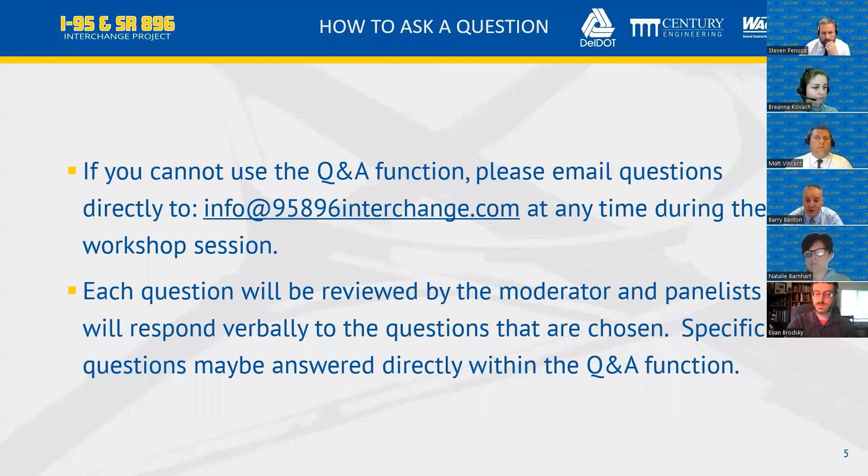So some introductions. First of all, as I said, my name is Barry Benton. I'm with GPI. I'm the bridge design lead for the project. We have two presenters for the project. The first presenter is Breanna Kovach. She is with DelDOT. She's the group engineer from Project Development North, and she is going to talk first. And then we're going to have Steven Penoza from Century Engineering. He's the design project manager.

Other panelists that we have on here to help answer any questions: we have Matt Vincent, the DelDOT Chief of Project Development North. Mark Buckalew, the DelDOT Chief of Construction and Materials. John Ledger, the DelDOT Group 2 Construction Engineer. Evan Brodsky, the DelDOT Group 2 Area Engineer. C.R. McLeod, who's the DelDOT Director of Community Relations.

Robin Bryson, with DelDOT Community Relations. Natalie Barnhart, AECOM Community Relations. Kate Ford, the Century Engineering Highway Design Lead. And Brandon Zarilla with Wagman. He's the contract project manager. Wagman is the contractor who won this under low bid.

The agenda for tonight is first, we're going to go through the project background. Then we're going to talk about the proposed improvements, give you an idea of what to expect during early stage construction, and then finally the question and answer period. So with that, I'm going to turn it over to Brianna, and Brianna is going to give you some information on the project background.

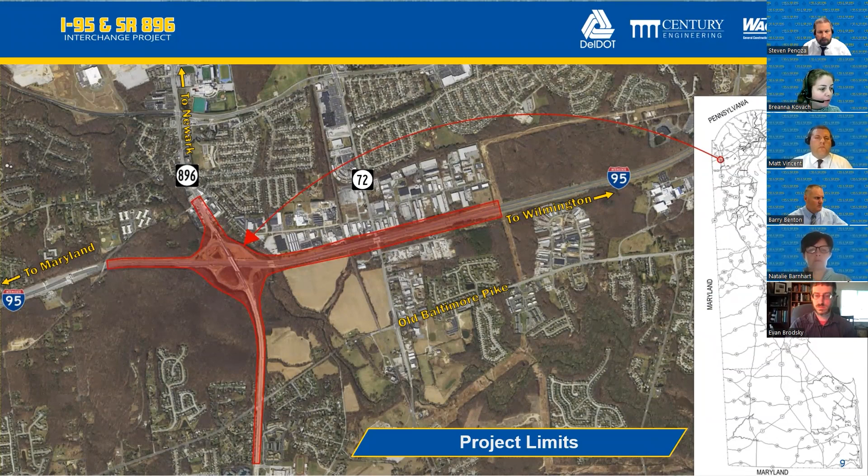Perfect. Thank you so much, Barry. And as Barry mentioned, we'd first like to start off by explaining a little bit about the background of the project and why we're doing this. I'm sure you're all very familiar with this location. The project is located in Newark, Delaware. The limits extend along 95 from the 95 toll plaza into Maryland to approximately a mile east of the interchange area. And along 896, the work extends from Glasgow High School from the south up to the north to Welsh Tract Road.

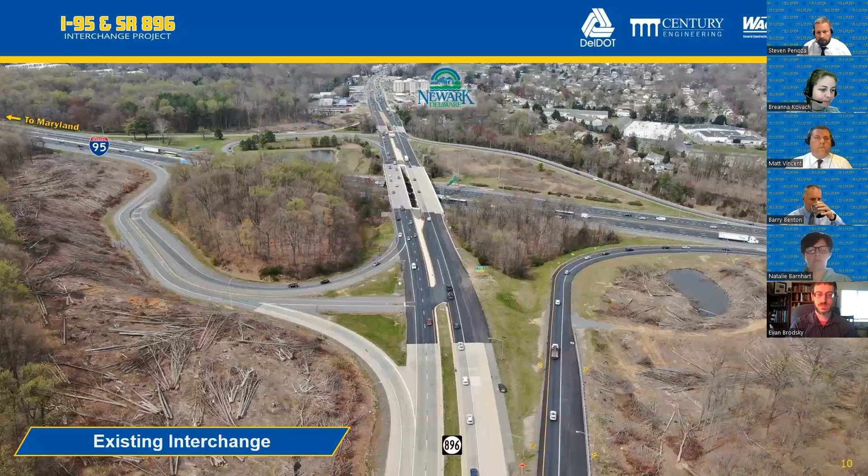And this is just a photo of the existing interchange as it is today, just to give you, again, some perspective of where exactly we're going to be working versus just the plan view that you saw on the previous slide.

The southbound 95 off-ramp to northbound 896 had a very short merge area on the northbound 896 when we started this project. That small merge area had a pattern of crash clusters in it. We'll get to it in a little bit, but this actually has since been remedied with a short-term project that we were able to implement in the interim prior to this bigger construction contract going out.

In the southeast quadrant, the northbound 896 ramp to northbound 95 experiences crash clusters as well. This is because the geometry here has a straight section of 896 as you're traveling northbound, leading downhill vertically into a fairly sharp curve. This causes difficulties for folks to maneuver, particularly large trucks.

Moving then to the southwest quadrant adjacent to Iron Hill Park, and also similarly the northeast quadrant, they actually have similar issues with the ramps here. You'll notice as you enter the ramp, there is a curved section followed by a straight section. Both of these ramps used to be tolled. Once the tolls were removed, what we see is that folks are exiting that first curve, gain some speed in that straight section, and then when they approach that second curve, they find it difficult to maneuver. So again, we see those crash clusters here as well.

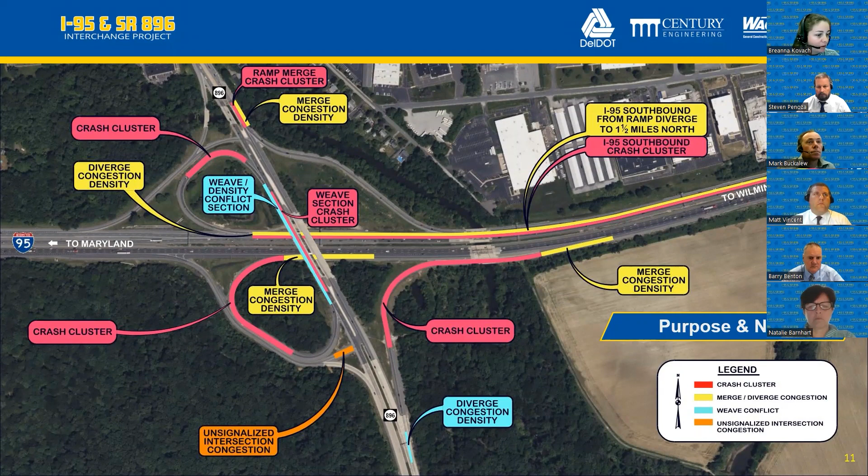So that last slide was a lot of information. And to summarize, the purpose of this project is to improve the safety and traffic operations of the I-95 and SR 896 interchange in order to maintain mobility for local and through traffic while not adversely affecting the operational performance of the I-95 Newark Toll Plaza. Our focus is to improve the level of service or operations of the 95 traffic affected by the merging and diverging traffic. Another big focus is to decrease the number, frequency, and severity of crashes here.

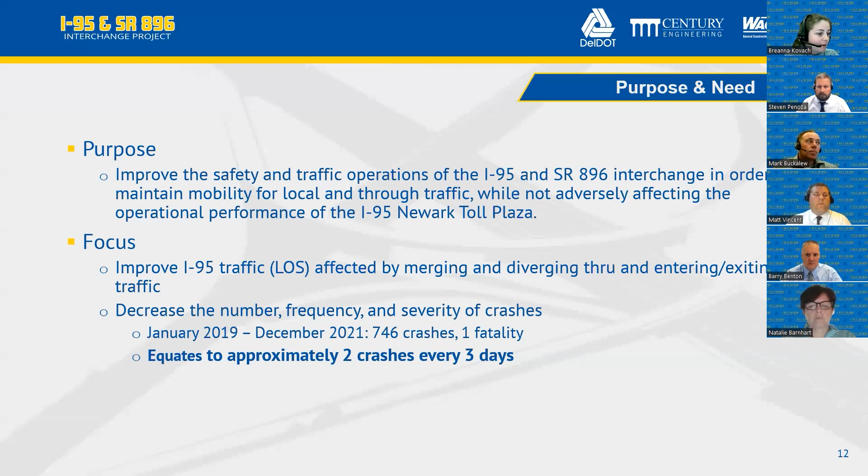Between January of 2019 to December of 2021, there were 746 crashes, including 1 fatality. This equates to approximately 2 crashes every 3 days. I'm now going to turn it over to Steve Penoza to talk through the proposed improvements to show what we're going to do to try to remedy these issues and what to expect during the upcoming construction.

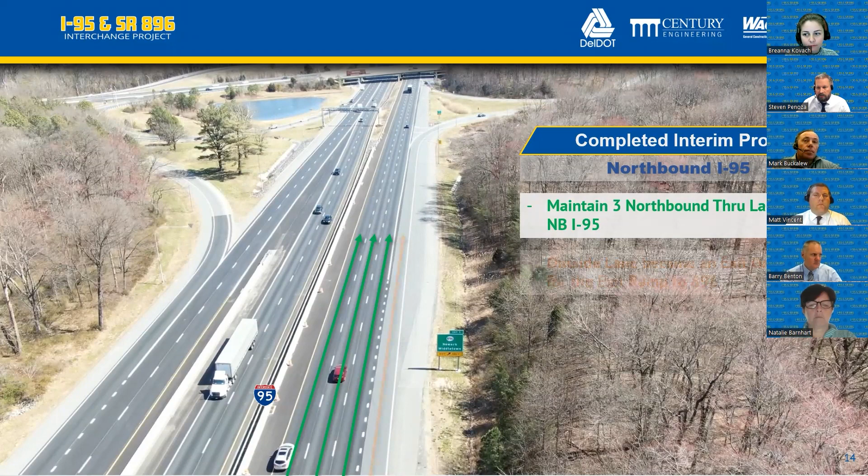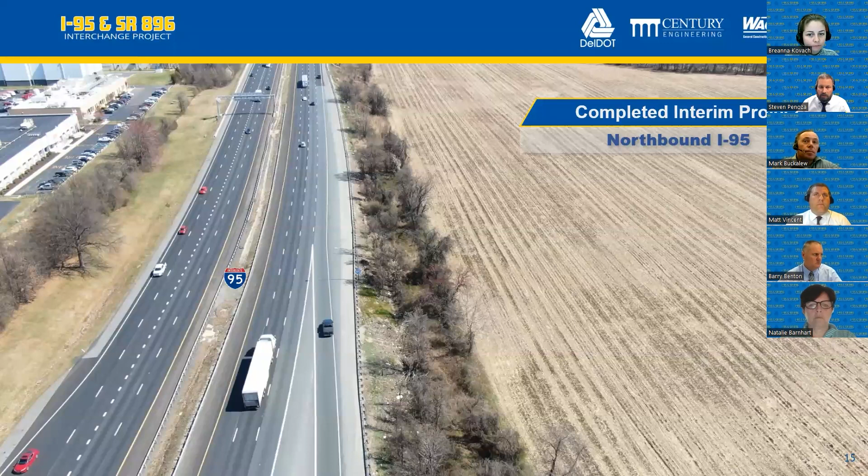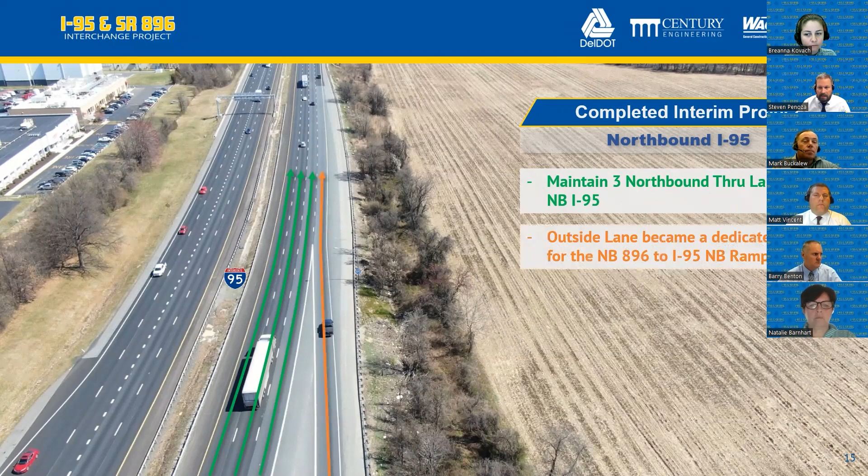Thanks, Brianna. So first I'm going to talk about some improvements that we've already done, which we did as an interim to the interchange project. So along northbound 95, which used to be a 4-lane section through the interchange, we maintained 3 northbound through lanes for northbound 95 through the interchange, and then our outside right lane became an exit-only lane for the exit to 896. So what that allowed us to do on the north side of the interchange was again maintain those 3 northbound through lanes on northbound 95, but now we can bring a very heavy ramp movement of northbound 896 to I-95 northbound on as a dedicated lane. So now that traffic doesn't have to merge in as it did previously.

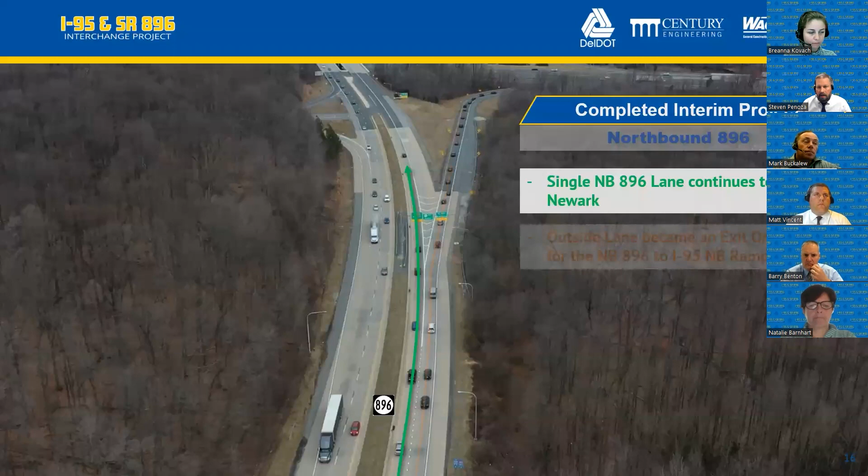We did a very similar project on northbound 896. Here we carried a single lane on northbound 896 into Newark, and then we made the outside lane become an exit-only lane for northbound 896 to I-95 northbound. What that allowed us to do on the Newark side of the interchange is maintain that single lane coming through north on 896 into Newark, but now the way it's striped today, the outside lane is dedicated for the southbound I-95 to northbound 896 ramp movement. So if you remember before, there was a very short acceleration lane for traffic merging onto 896, and this eliminated that issue.

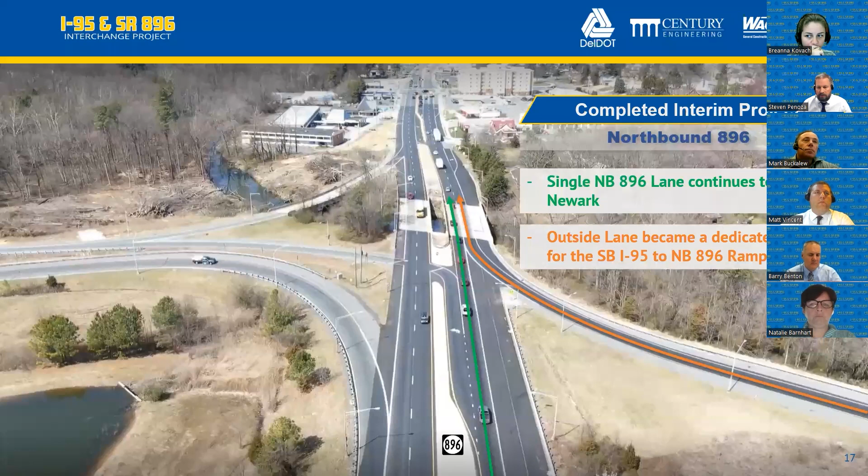But the interim improvement projects didn't solve the main problem at the interchange that Brianna was discussing. The accidents are still very high at the interchange, so a full reconfiguration of the interchange is required. So this slide goes over some of the main points of the project.

So we're going to be constructing 6 new bridges, 10 mechanically stabilized earth retaining walls or MSE walls. We'll be widening I-95 both northbound and southbound for approximately a mile, and that'll be for the ramp acceleration deceleration lanes for the new flyover ramps. We'll be doing rehabilitation of 6 mainline I-95 bridges while we're out there. That includes widening of 4 of those existing bridges for those new ramp accel and decel lanes.

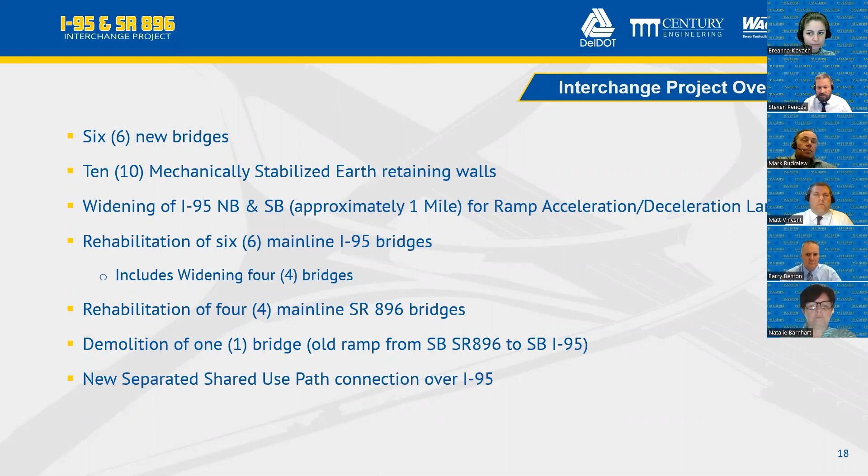We'll also be doing some rehabilitation work to the 4 mainline 896 bridges within the project limits. There will be demolition of 1 bridge, which is the current ramp for southbound 896 to get to southbound I-95. That ramp's being reconfigured, so that bridge is no longer needed. And then we're also going to be creating a new separated shared use path connection over 95 that I'll talk about in a little more detail.

So safety improvements that'll come with our new interchange configuration. The biggest is separation of those ramp movements that Brianna was discussing. We're going to eliminate that weave condition on SR 896 where 896 crosses 95. We're going to be doing the I-95 widening, which is going to provide longer acceleration lengths for merging traffic. There'll be enhanced roadway lighting, some new high mast lighting throughout the entire interchange area.

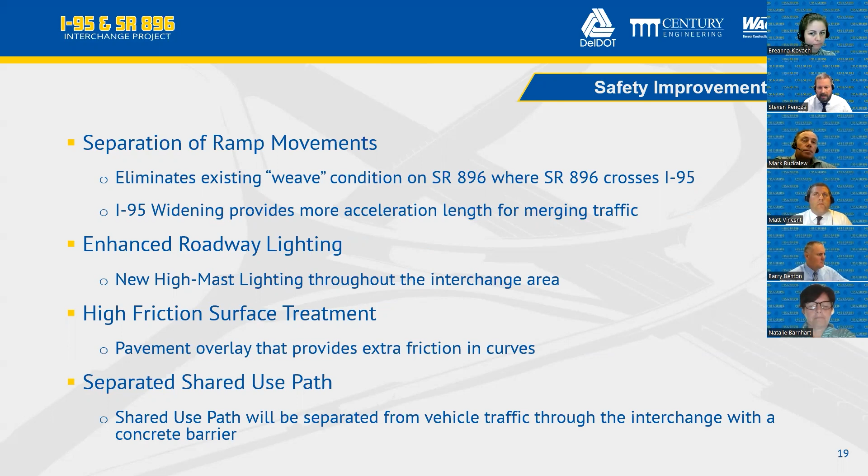We're also going to be implementing a high friction surface treatment on some of our curved ramps. And this is basically a pavement overlay that provides extra friction in curves. And then again, the shared use path. The shared use path will be a separated path from vehicle traffic through the interchange with a concrete barrier.

But coming southbound on 95 to go southbound on 896, you're now going to take our new flyover ramp. So the flyover ramp goes up over 896, over I-95, up onto Iron Hill, and then merges with southbound 896 traffic.

And then the last major movement of the interchange, northbound 896 and northbound 95, that ramp will be reconfigured, but it's essentially the same movement as it is today.

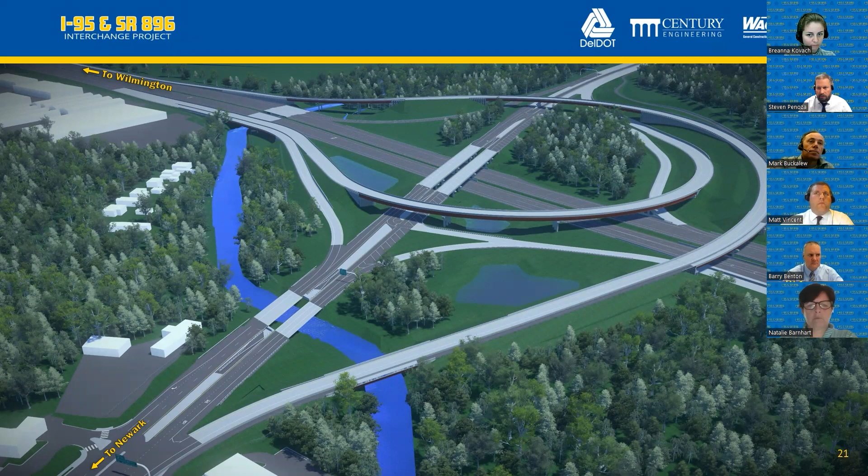Next, I want to talk a little bit about what everybody can expect during the very early stages of construction. Just overall project schedule. We're getting ready to get started here in a couple weeks. You're going to see message boards placed out there very shortly. And then we're anticipating construction is going to be completed in the fall of 2025.

So the beginning of construction, it's broken down into 2 phases. Phase 1 is a very short phase from May to June of this summer. And then when we get into phase 2A, it's a longer duration, about a year, from June of this year to summer of 2024. With this project, we do have 2 long-term detours that'll be in place.

So if you're traveling northbound on I-95 to get off at 896, it's a very low volume ramp. This is going to be closed starting at the beginning of the project in May, and it's going to remain closed for the duration of the project. The detour for this is very simple. We're going to be sending traffic up to 273, turning them around and bringing them back down to the interchange to use the existing ramps to go north or south on 896.

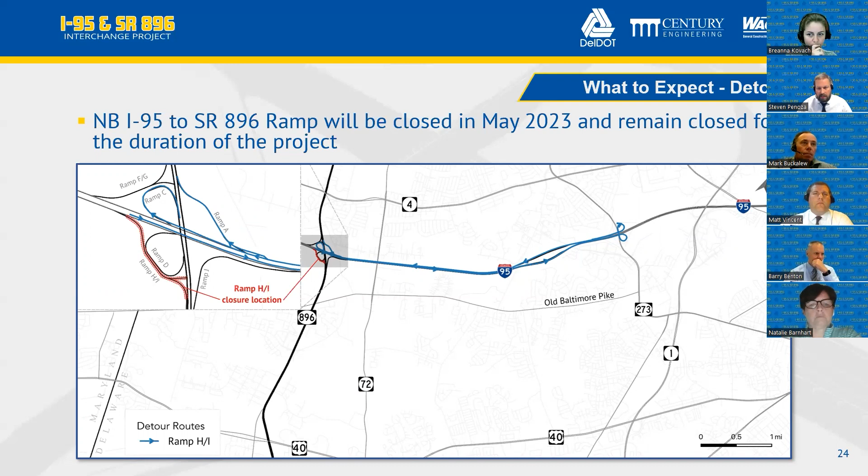A little further into the project, the ramp on the other side, so this would be your 896 ramps to get on southbound I-95. Those are going to be closing in the summer of 2024 to the spring of 2025. And the detours for this are very similar, using the 273 interchange as well as the old Chestnut Hill Road turnaround.

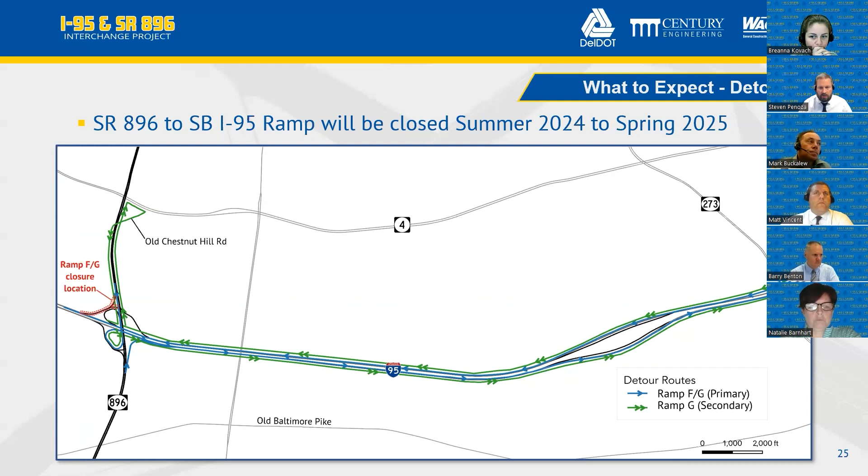We could also expect some additional overnight detours on I-95, 896, 72, as well as the various ramps. There'll also be shoulder and lane closures on I-95, 896, and 72. During phase 2A, northbound and southbound I-95 traffic is going to be shifted to the median shoulder, but we will be maintaining full capacity of I-95 during the day.

Southbound I-95, this configuration will be in place for about a year from this summer to the next summer of 2024. Northbound I-95 will be put in this configuration same time as southbound in the summer of 23, but that's going to go a little bit longer to the end of 2024. And then probably the biggest impact to traffic, especially local traffic, is we're going to have to take SR 72 down to 1 lane in each direction from starting this summer to next summer, so for about a year long.

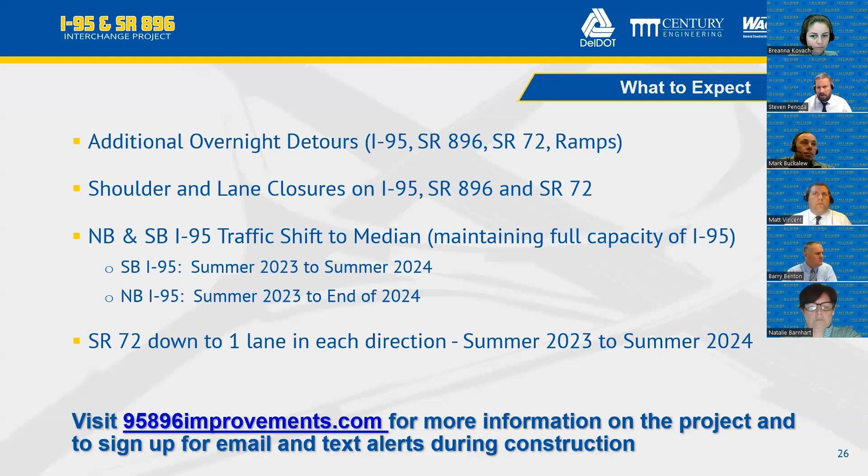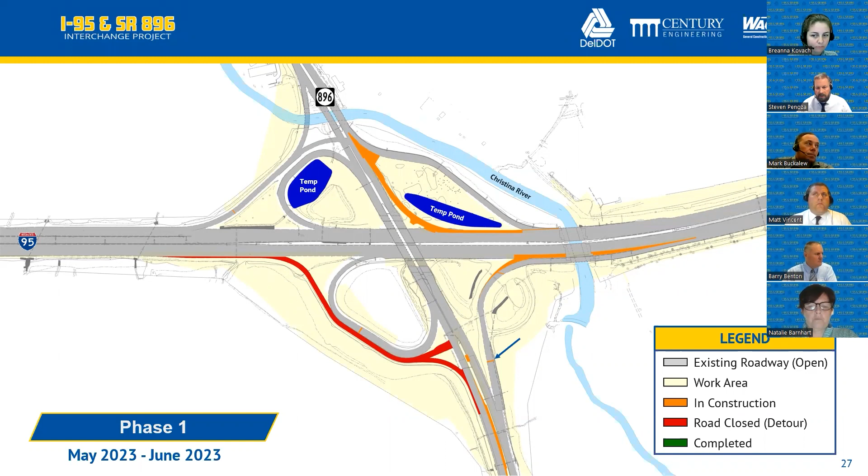So as I said, phase 1 is a very short duration phase. It's really setting up for phase 2A, which is the big phase for the project. So this is going to be May to June of this year. So the first thing we're going to be doing is installing some temporary drainage. This is going to require nighttime ramp closures. We're going to be building a temporary ramp, so your I-95 southbound to 896 northbound. The existing ramp will remain open during phase 1, and we'll be building this temporary ramp to allow us to do work where the existing ramp is today.

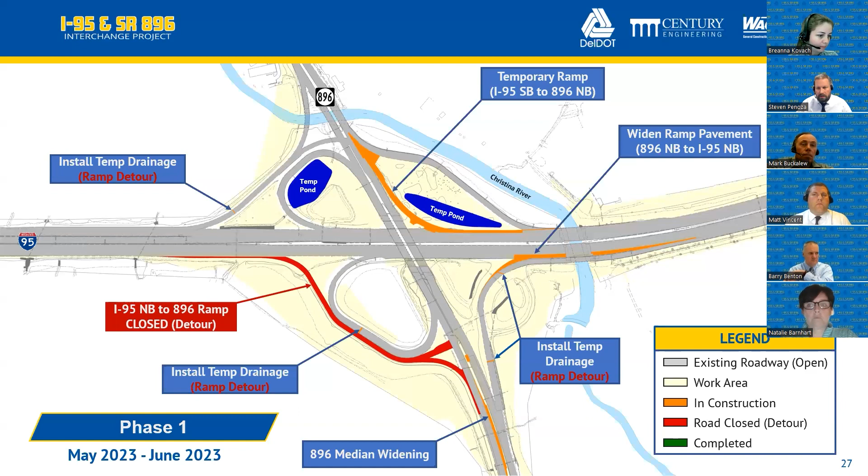We'll also be doing some widening of the ramp 896 northbound to I-95 northbound. And again, that's to set up for the next phase of the project. And then we'll also be doing some widening of 896 in the median for a traffic shift during the next phase. And as I said earlier, the I-95 northbound to 896 ramp will be closed during this first phase, and that will be for the duration of the project. During phase 1, we'll also have some overnight detours for northbound 896, full closures of 72 for some night work, as well as the ramps that we talked about for the temporary drainage.

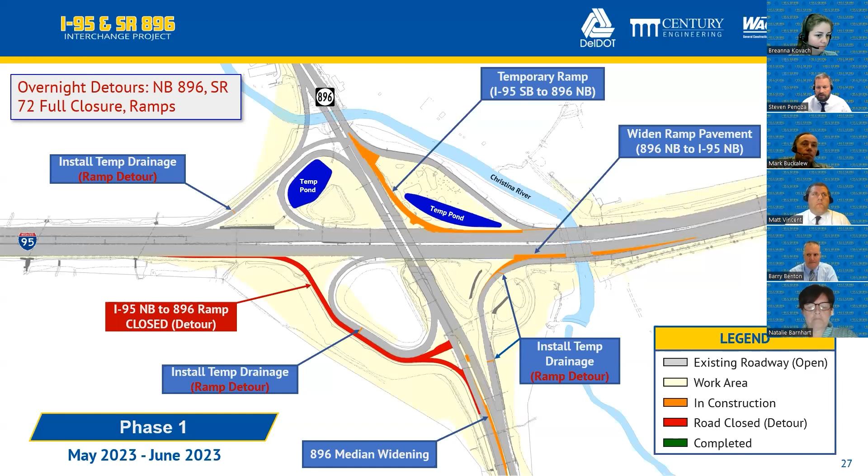Phase 2A will start June this year and run till next summer. As I said, this is a big phase of the project. You can see everything in orange. The job really opens up in phase 2A. We will be widening I-95 northbound and southbound for our new flyover ramp tie-ins. We'll be widening the existing bridges of I-95 over SR 72. And then we also need to widen the I-95 bridge over the Norfolk Southern Railroad. We'll be constructing our 2 new bridges over the Christina River. These are for our new flyover ramps.

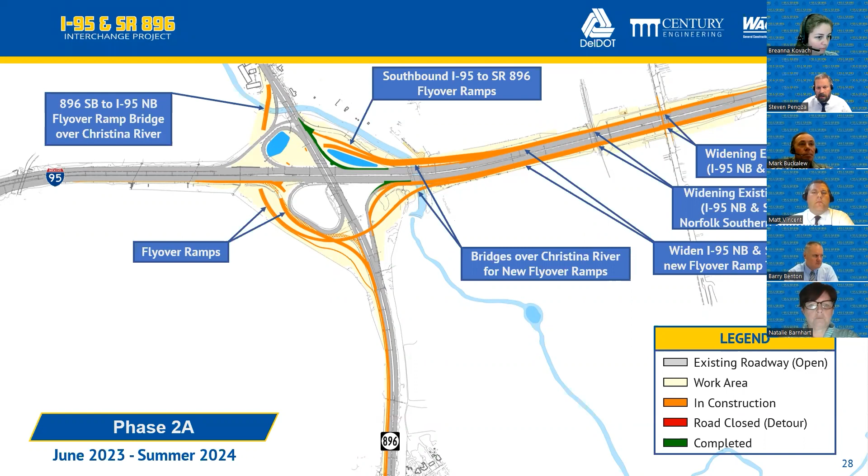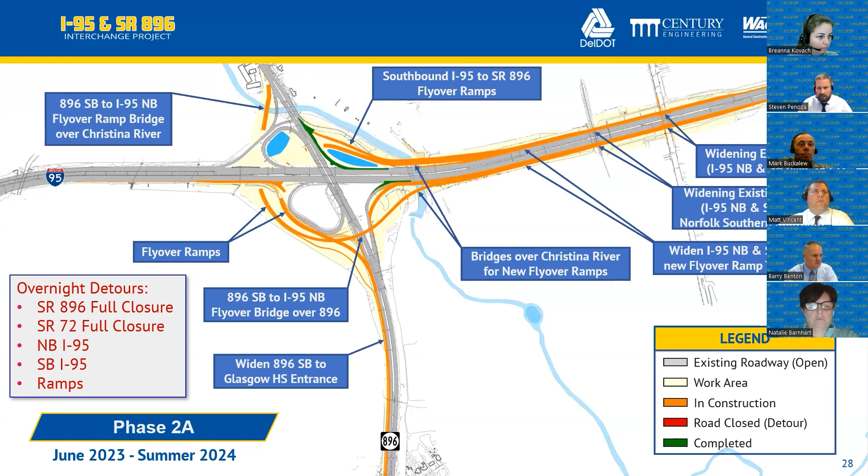Building the new bridge for the flyover ramp to come out of Newark, 896 southbound, I-95 northbound. And then we'll be widening southbound 896 all the way down to the entrance to Glasgow High School. During this phase, there will be multiple overnight detours. We'll be doing a full closure of 896, again, full closures of 72. There'll be northbound I-95 closures, southbound I-95 closures, and ramps. And again, just to emphasize, all of these detours are overnight.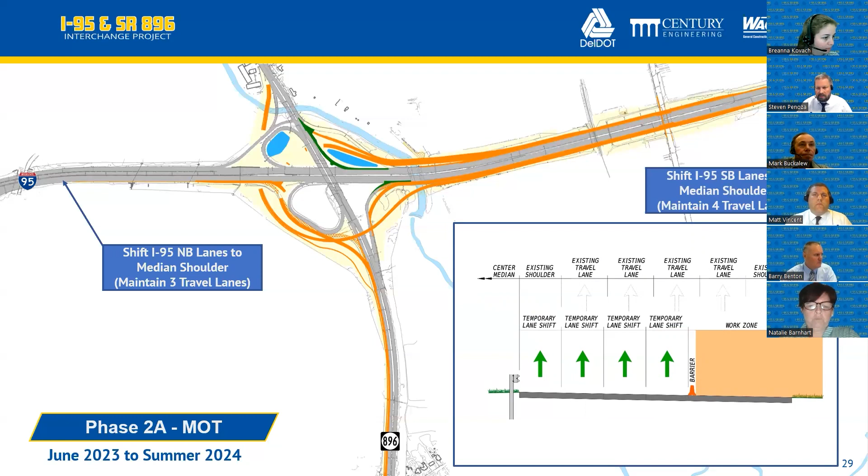This picture is from the video that's available on the website. I would encourage everyone to go. There's 2 really good videos, one that describes the project in detail, and then another that goes through what to expect during the beginning phases of construction. So this picture here shows, again, work zone on the outside, and then the I-95 traffic shifted to the median shoulder, and just emphasizing again, we're maintaining all of our travel lanes through here.

On 72, through the work zone, traveling northbound, you reduce to 1 lane going through the work zone, then return to 2 lanes once we get outside of our work zone. And then coming southbound, again, we'll be reducing southbound 72 to 1 lane. That lane will be shifted to the north side of 72, traveling through the work zone, and then returning to 2 lanes once we get through the work zone. There's also an existing shared use path that goes along 72 underneath the I-95 bridges, and that path will be maintained through the work zone.

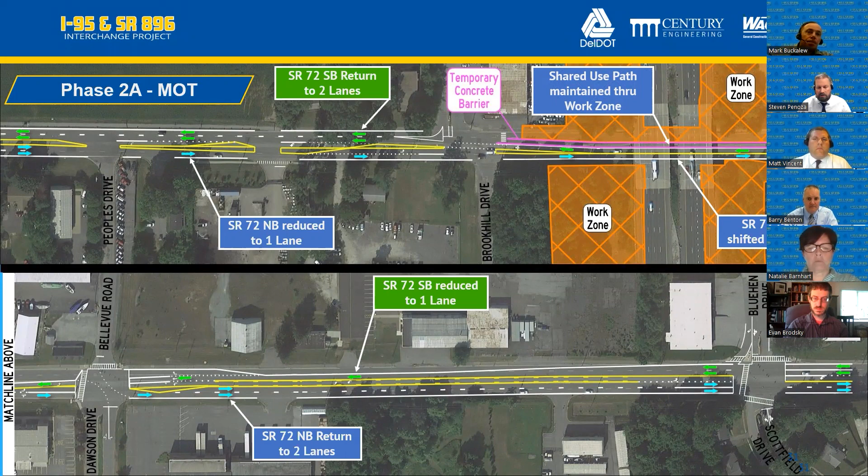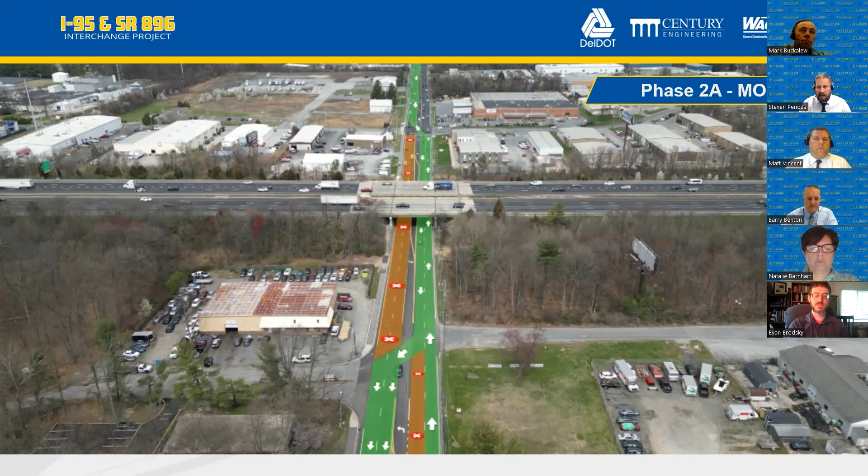And again, this is another picture that I took from the video that's available on the website. This is just another graphic showing you 72 looking north, showing the traffic down to 1 lane, shifted to the north side of 72, and then the south side of 72 becomes our work zone.

So with that, I'll turn it back to Barry for our question and answer session. Thank you very much, Steve and Breanna. Great job. And I see that we've got a number of questions that are already coming in. So we're going to go ahead and take these in the order they're received. If you still have questions, feel free to continue to add them in there.

Okay. So our first question that we have is, have you considered adding a light at the I-95 northbound exit ramp, especially for those wanting to turn left on the 896 northbound? Steve Penoza, that one's going to go to you.

So with the reconfiguration of the interchange, and as Breanna had shown that weaving condition that we had, with the flyover ramp coming southbound 95 to southbound 896, we're actually reducing the traffic that is on southbound 896. So making that left from northbound 95 to northbound 896 will actually be less traffic. And then the other factor there is that it will be in 1 lane. So you're only going to have to cross 1 lane to then merge in. So the traffic will be less there than it is today. Thank you, Steve.

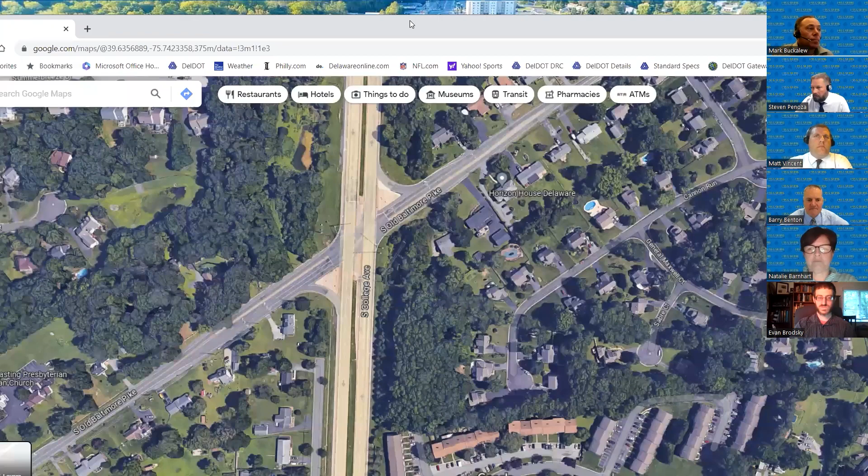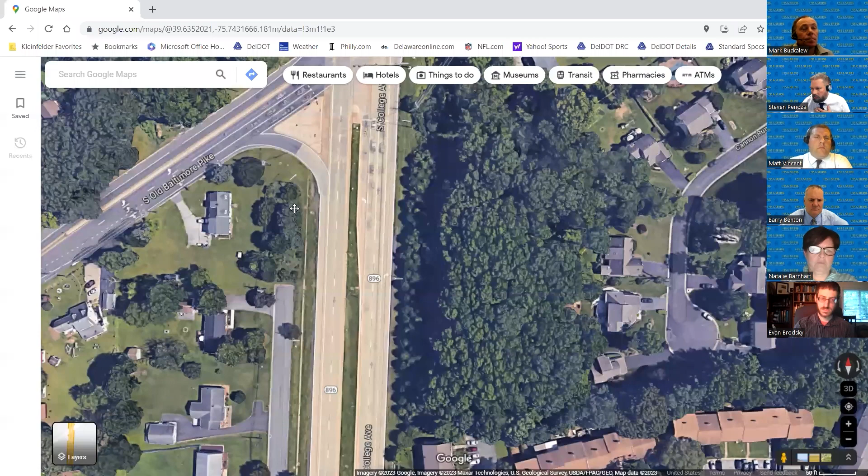Yeah, I'm gonna just pull Google up on the screen real quick here. Yep. So our new trail system is gonna come down southbound, as I said. There'll be a new crossing across Old Baltimore Pike, and then the section of the trail terminates here in what is, I guess, Old South College, which is now just a residential road.

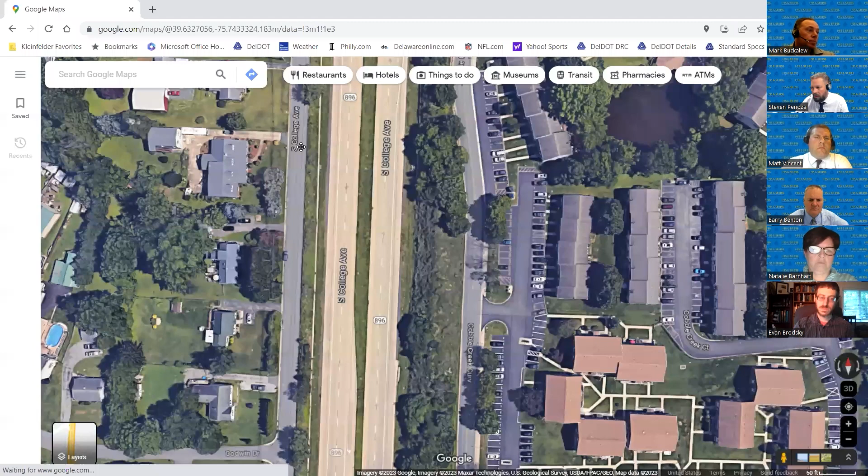So when I say the new trail system, it connects to Old College Road, which is a residential low volume road. And then it would continue to the south with this trail that continues down through the next couple intersections.

Thank you very much, Steve. Good presentation. Thank you. I don't take any credit.

Explain nighttime closures of 896. How can I get to 95 from Four Seasons? Mark Buckalew. So depending on where on 896 the closure is, depends on which activity it is. But let's just say it's closed just on the other side of Old Baltimore Pike. You could take Old Baltimore Pike straight up to 273 to jump on 95, or you could take Route 40 down to Route 1 to jump on 95. That would probably be your fastest route.

Okay, thank you. The next one, for those of us who live north of 95, what alternate routes would you suggest so we can totally avoid the work area, especially to go north on 95? So I'll take that one, Barry. Thank you, Mark. If you're living north of 95, your best route is going to be to take Route 4 to 273 to 95. I'm just going to be honest with you. I don't find that to be a great route for you either, because you're going to get through a lot of signals and congestion as you hit 273.

I think you're just better off just taking one of the exit ramps to go northbound 95. We're not really restricting much there, except for the nighttime stuff. But I think that's probably your best route, is just stick with your normal route. Great. Thank you, Mark.

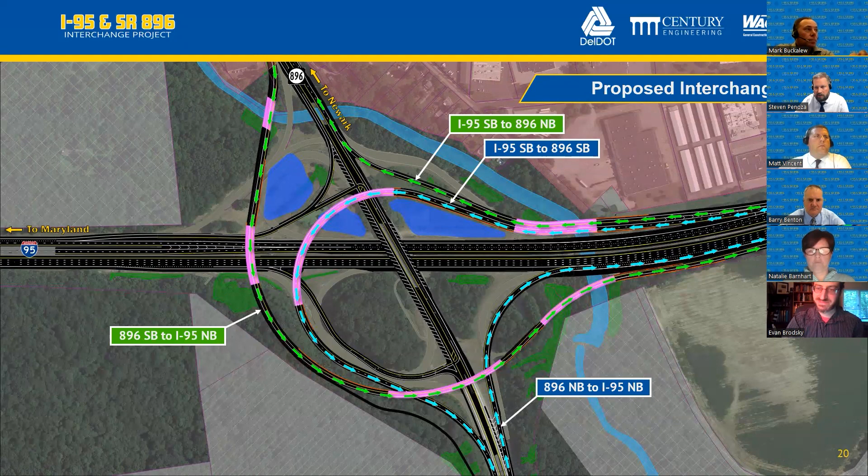The other flyover ramp would be coming out of Newark, southbound on 896. You'll get off at this exit prior to the interchange, across Christina River, up and over 95, up onto Iron Hill, across 896, again across the Christina River, and then merge with northbound 95. And you can also see them here in the slide. So this is your southbound 95 to southbound 896 flyover ramp. And then again, coming out of Newark, to go northbound on 95, you'll take this flyover ramp up and around and up to 95.

I got excited for a second. I thought it was going to be a bridge question.

What areas or roads around the region do you anticipate may be much busier as travelers try to avoid 95 and 896 during these few years? Steve. Yeah, I just want to emphasize that during the travel times during the day, we're not going to restrict 95. We're not going to restrict 896. We're not going to restrict those 4 big ramps that I talked about. Those movements are too heavy to close during the day.

We all expect that taking 72 down to single lane each direction is going to be the biggest disruption. So that's going to put more traffic on the surrounding roads. Salem Church Road, it may put more traffic onto 896 as well, Old Baltimore Pike. So it's going to be those roads, different routes to get around the 72 congestion. But when we do have our detours in place at night, I also want to say that we're trying to catch traffic before it gets to the interchange.